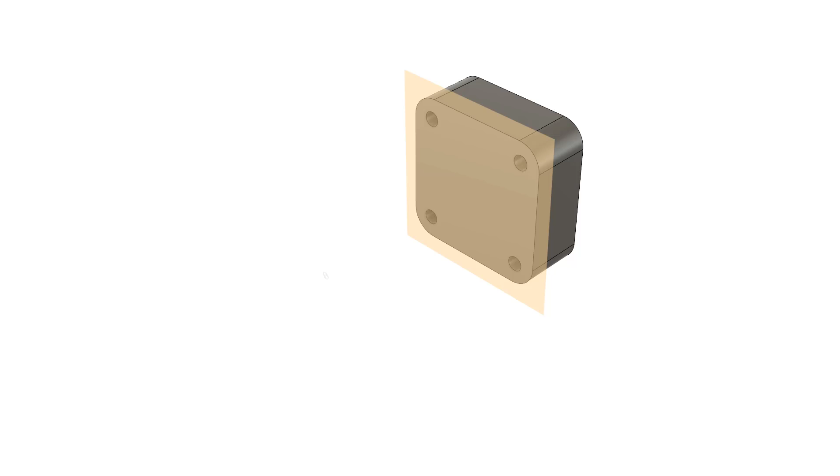The project command is a tool that projects the body silhouette or sketch geometries onto the active sketch plane from existing geometry, and can only be updated when the reference geometry is updated. This is useful when you want to create equal geometry across separate sketches, but only want to edit one sketch to have the changes propagate across.

In this example, you can see two components in the assembly, and the 4 bolt holes on the large end cap need to be projected onto the sketch of the small end cap. The idea being that if you ever need to change the bolt diameter or locations, you won't need to individually edit the values for each hole on separate sketches or components, thereby improving your workflow and reducing the risk of downstream errors. Go ahead and edit the sketch on the small end cap to begin.

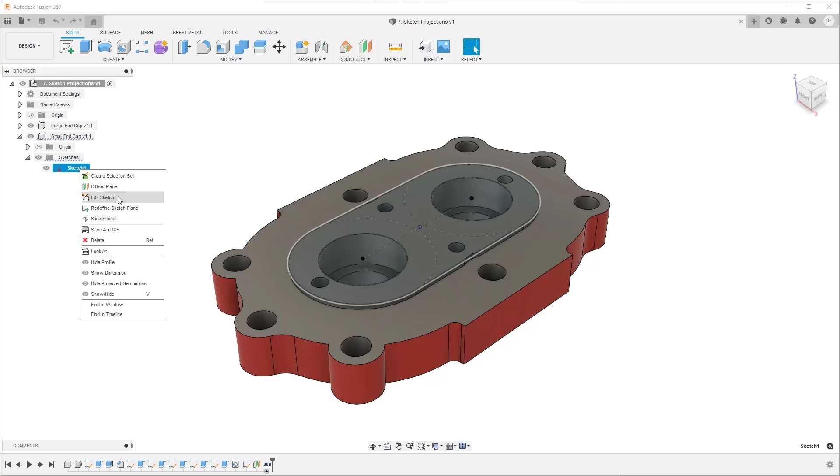On the toolbar, in the Create menu, expand the Project Include menu, then select Project. Fusion 360 is asking to either select individual geometry or an entire body. Individual geometry includes lines, points, or arcs, for example, whereas an entire body will project a silhouette of the selected bodies.

Leave this as specified entities for now, then hover over the underlying holes on the large end cap body until you see a red outline. Fusion 360 is previewing the projected sketch, and to select it, just left click with your mouse. You can continue adding geometry to the project command, so repeat this for the other 3 holes.

You will now see in the dialog that we have 4 items selected, and those items are shaded blue on the canvas. If you ever add geometry by mistake, you can always left click on it to remove it from the selection. Make sure the projection link is checked, as this confirms you want to create projected geometry that will maintain an associative relationship between the projected geometry and the active sketch. If unchecked, then basic sketch geometry without a reference will be created.

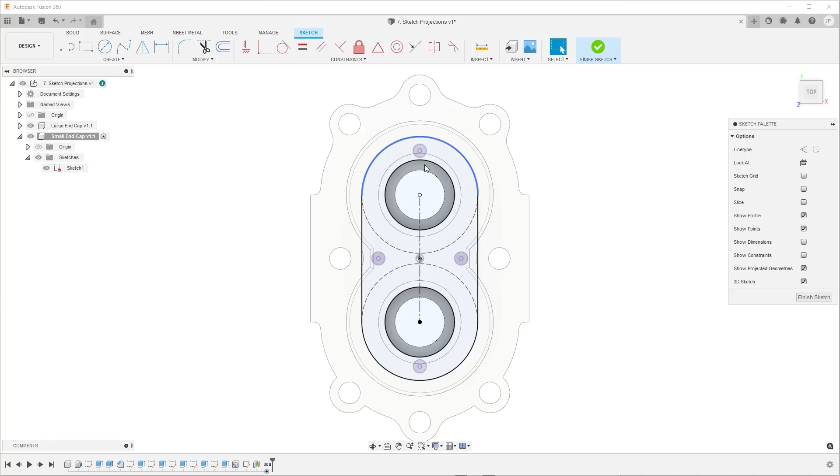Go ahead and hide the dimensions and constraints using the sketch palette, as well as hiding the large end cap component. You can now see the purple geometry on the small end cap sketch, which confirms it is projected. If you now click on one of the circles, take note of its dimension in the lower right hand corner of the canvas.

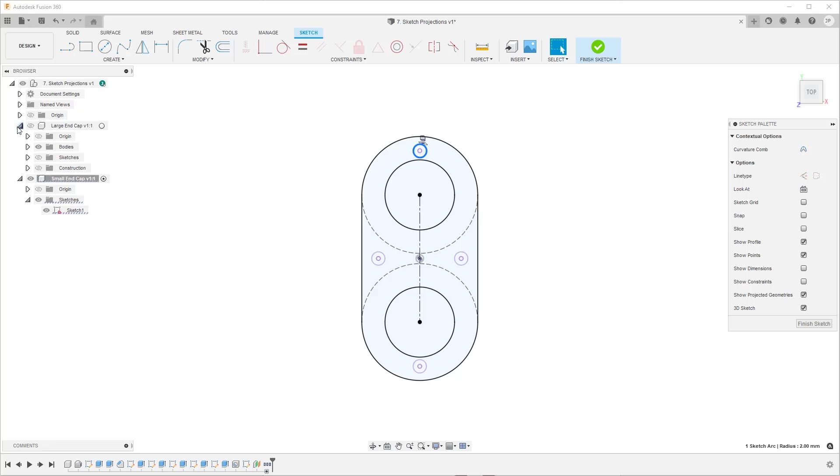To edit projected geometry, you need to edit the reference geometry. Go ahead and edit sketch 4 in the large end cap to bring up the reference geometry. Here you can see the 4 holes, with just one dimension placed and the remainder with an equal constraint. Double click on the dimension to edit it, put in a value, press enter, then exit the sketch.

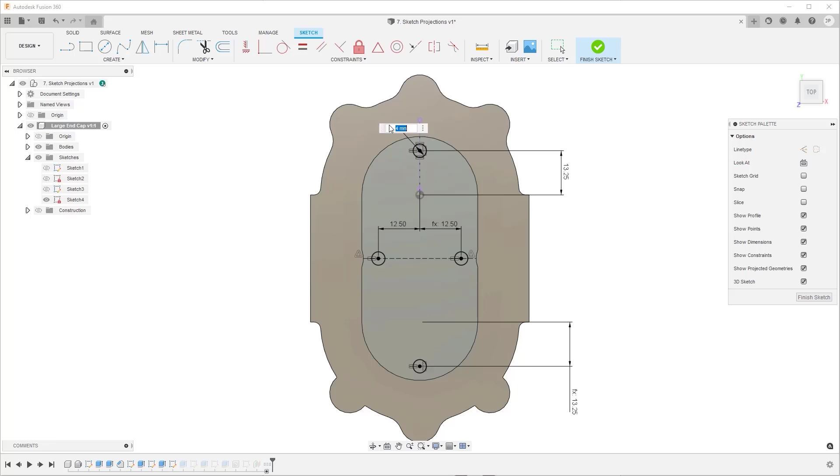Go back into the small end cap sketch and edit it, and you will see the size of the holes have updated, even though the value was updated on a separate sketch on a separate component.

One final feature is the ability to break these projected links in the event you do not need to maintain that associativity between the projected sketch and its reference. To do this, right-click on any projected sketch geometry, then select Break Link. Now you have an unconstrained sketch which you can edit to suit, although note, this operation cannot be reversed.

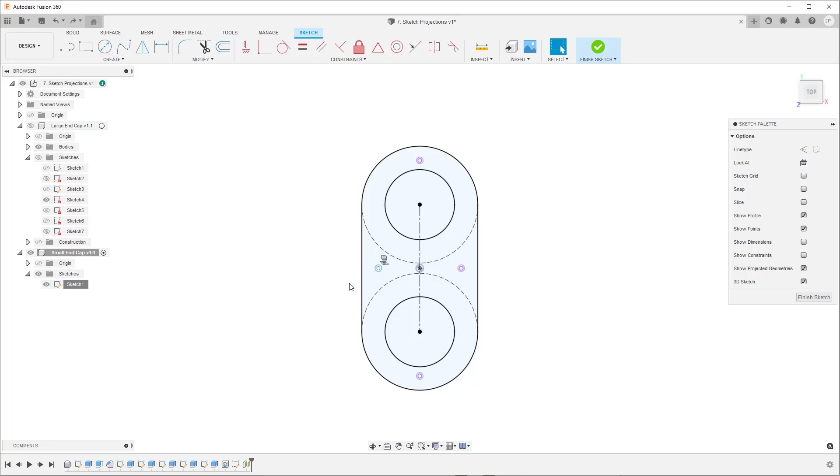Now you know how to project existing geometry into a separate sketch and reference it to drive a sketch profile in a parametric design in Fusion 360.